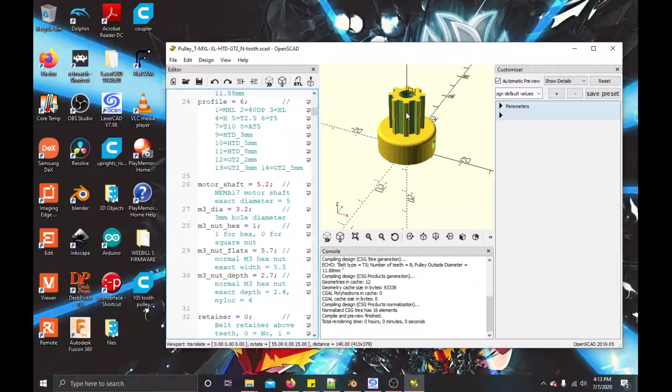I was having issues with SCAD information for the dimensions of the pulley teeth, and I wanted to talk about that. If we go to new, we open that information like before. You remember I was telling you guys that you can add whatever amount of teeth and information. Well, there's a way to do it accurately so the teeth will actually fit on a belt. But I don't know exactly where that information is in here, how to set the dimensions, because once you start scaling it out, it actually throws off the teeth information. So this would actually be fatter and it's not accurate.

That's why whenever I was setting it up for 260 millimeter or 260 teeth earlier, it gave me that weird big tooth spacing that I was a little confused about. I thought that was me, and I thought I had the wrong amount of teeth, but I was right, I did need 260 teeth. It's just this scaling for the teeth dimension was way too big and it threw a lot of stuff off.

So if you're not wanting to try to figure this out, because I really don't have the time to read through all the code to figure out exactly what's going on—it mentions a few things here and there that kind of get you started, but it's not a set thing—I'd recommend, if you're trying to do it, another way which is a lot quicker. Granted, it's using Fusion 360, but it's still pretty quick. So I'm gonna show you guys now how I got this going.

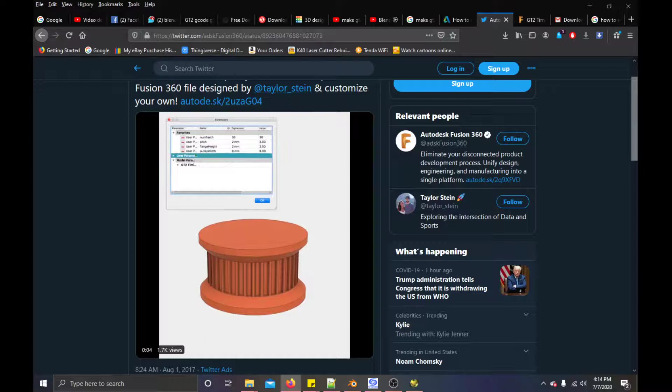So if you go to this website here, it's a Twitter website. It shows a Fusion 360 file designed by Taylor, and it's a customize-your-own. So it gives you this information here to show how to make your own.

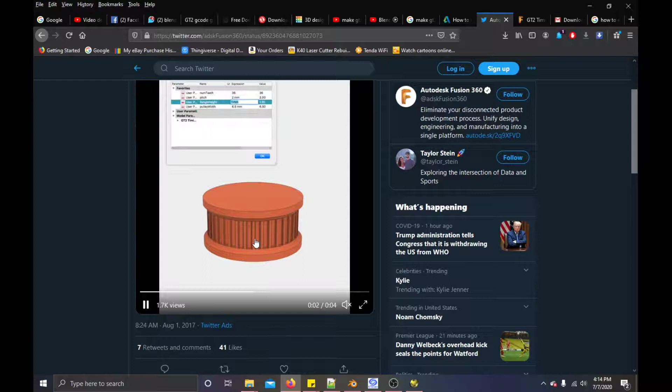So that's what I did. I went to the website, just clicked on it. Once you do, it comes up as a new tab. At that point you'll download the Fusion 360 archive and it will go to your email. I had it go here, downloaded the file once I went into my Gmail. Once that happens, it comes up as one of these. So you just click on it and hit open, and as long as you have Fusion 360 installed, it'll pull up automatically for you.

I still use Blender. I try to stay away from Fusion as much as possible because we never know when Fusion is not going to be free anymore, and I know for sure Blender is always going to be free. That's why I'm not trying to use Fusion as much. I do use it for certain things I just can't get around, for instance this, because nobody's built an add-on or a Python script or any kind of generation coding information to make a gear for GT2 pulleys. So that's the only reason I'm using Fusion right now. But honestly I'd rather not. This is all I have to use, which is pretty quick to do.

So now that you have it open, for some reason it opens up two tabs. I don't know why there's two, but it opens two for me anyway. I don't know if it'll do it for you.

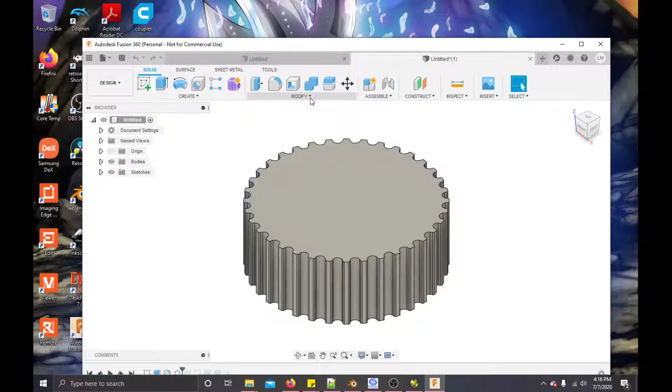You're going to go to modify, then down to change parameters. Then all you have to do is set the number of teeth you want. So if I want 260, I put it there, click down and click OK. Give it a second because my computer is probably a little slow with this—Fusion is a very high demanding software for CPU usage. It seems like it takes a while. Once that happens, you see the value change to 260, and even the background got bigger.

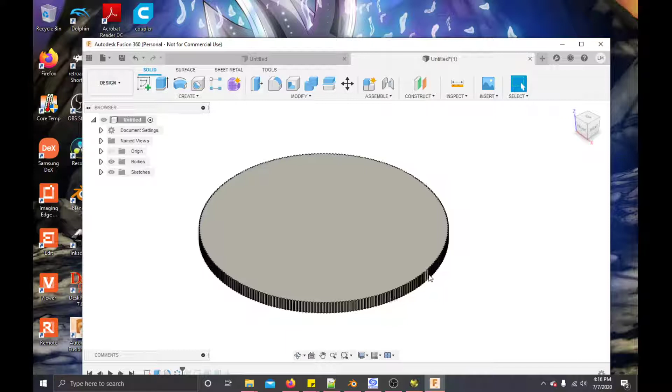So we hit OK, and we have to scroll out so you can see it. Now you can see this is 260 teeth basically around, and it's about 260 millimeters.

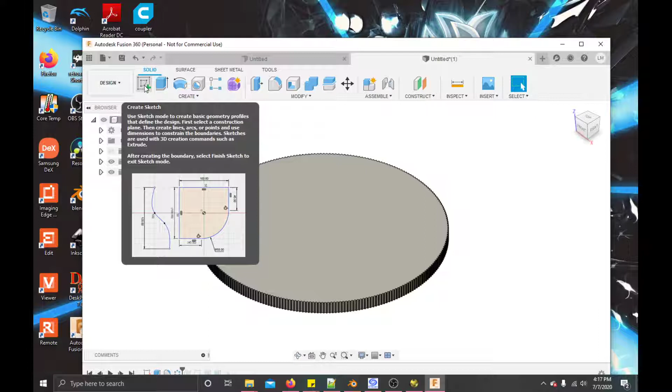Now for my flange, or bearing, like I was mentioning beforehand, I need to be able to mount that. Quick and easy, really fast, I'll show you guys. My measurement was 145 for the inner diameter hole that needs to be mounted to my actual bearing. Granted, I do need other holes that mount this part to the bearing, so I need like M4 or M5 screw holes on the part, but the center diameter needs to be hollow.

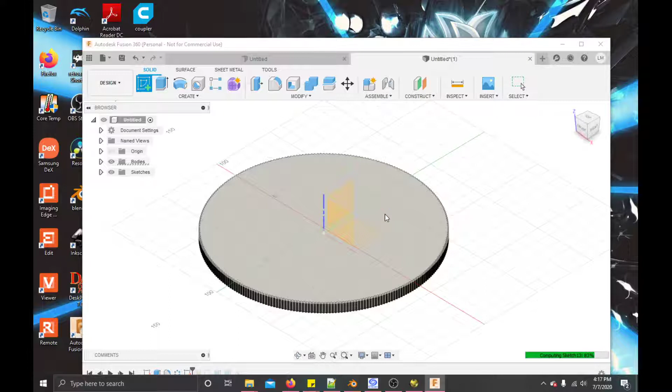So we need to just create a sketch really fast, and we want to go to the top. It gives it a second to load here because there's a lot of geometry going on. We'll go to the top, and now that we have that, we'll hit this center diameter hole, go right to the center, and pull out. You just click and pull it out, and I'll do 146.

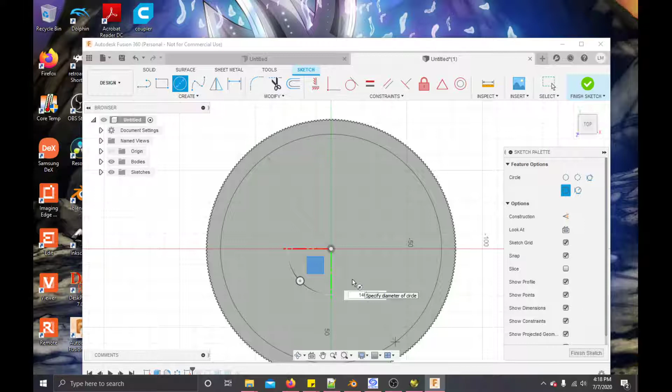That gives me a little bit of clearance for the spacing, and then I'll hit enter. The spacing I mean is I want to make sure that the outer diameter still shows a little bit of the metal or aluminum. Once you cut through here, you'll see a little bit of aluminum, because I don't want this to overlap the aluminum—I want this to be sitting on it. So I just wanted to make sure it has a little bit of aluminum peeking through on the edges.

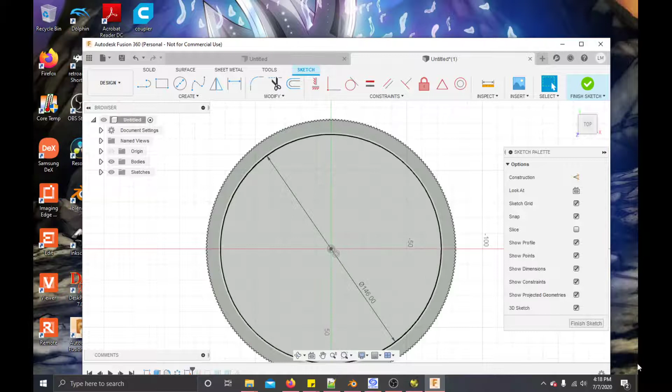Anyway, now that I have that, the next step would just be to cut it out. So once we're done with that, just click Finish Sketch. You can move your geometry a little bit here. So what we want to do next is just click on this little corner, and then let's do this and this. There we go.

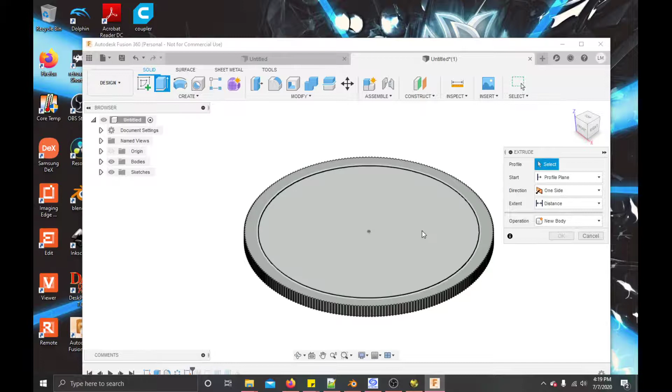Now what we're going to do is just hit Extrude. Just like in Blender, you'll extrude in or down or up or left or right, whichever axis you're on. Right now we're on the Z-axis, so we're going to be extruding downward. We just pull this down and hit OK, and that will cut straight through it. Now we have that diameter hole.

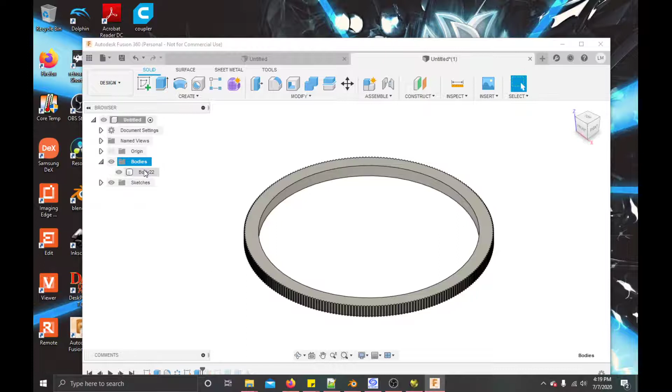Now the next step would just be to hit Bodies—right click, well actually you have to drop it down so you can get to the body, so you have to do the drop-down arrow, right click on it, and then you're going to save as STL. Then it's going to start generating the mesh for you, and you'll start seeing lines pop up.

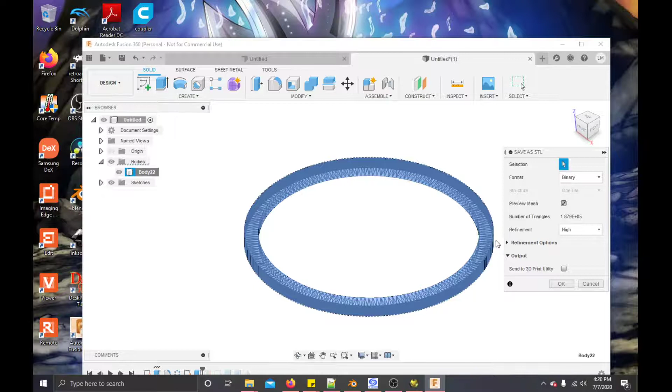See right here, these are the vertices, edges, and faces basically. And then you can set your resolution. I set mine to high. You can set it to low or custom or whatever you want, but that'll be the number of triangles inside of here, which is kind of dumb—I wish I wasn't doing all this, but it's fine. I'd rather have high resolution because I want my circle to be very circular, not kind of like an octagon shape. Once that's done, you just hit OK.

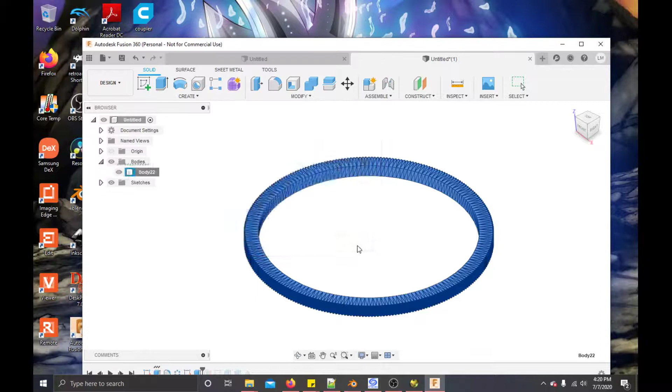Then you'll just type in whatever—I already made one, so I have that information and don't need to save it, but you'll type in the name and save it. It'll go to wherever you normally save files; mine goes straight to downloads, I don't know about yours. So then you hit save, and you're all good to go. It exports out, and then you can bring it into Blender.

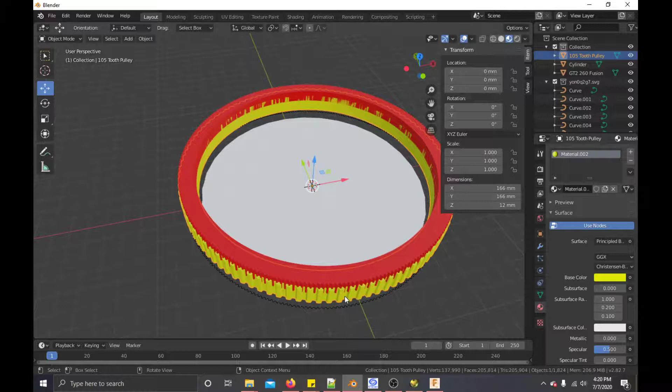That's what I did—so originally I brought it into Blender, sorry. So what I did was bring it into Blender. First, just to make sure this was wrong—this is the yellow one right here—is the one I got from this SCAD version that I was first showing in the first video.

And now you can see, if I scale in and move around a little bit, the teeth diameter is not accurate. So this right here is an SVG that I started from in the first video that I was able to go back to and see. So I generated the SVG using the GT2 information that I showed you in the first video.

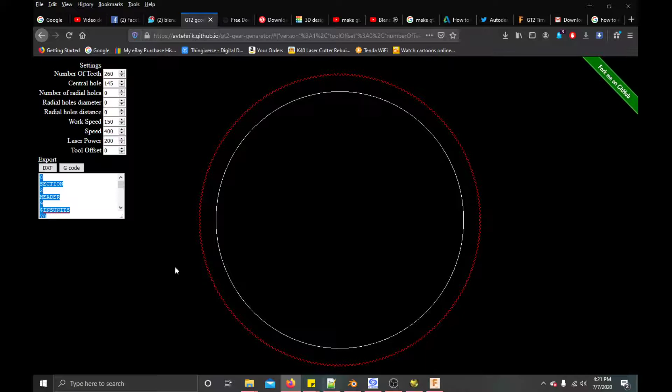So this is 145 for the hole diameter, then 260 teeth—see that? That's exactly 260. So I wanted to make sure that one of these was going to line up with this SVG file, so I had to convert that into SVG. Like I mentioned, it'll be on the first video because it comes out as a DXF file. Anyway, I was able to get this into Blender as an SVG because this doesn't take DXF, I believe, and at least Blender doesn't.

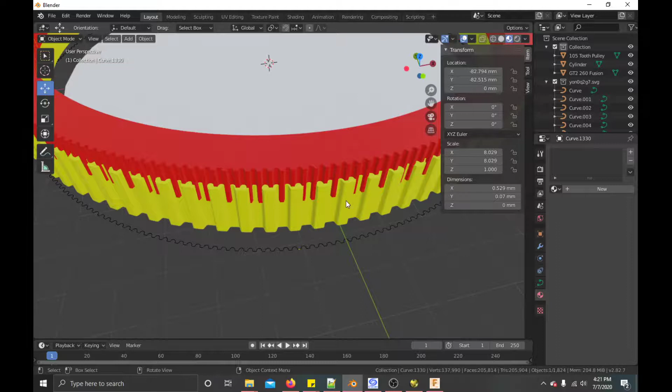Then what I did was just try to line them up so I could see if they were lined up properly. So you can see from the top view, if I do Shift Z, we can kind of see the differences here. This is the yellow one—you can see how fat these teeth are. This is definitely not a GT2, look how it's taking up about a whole tooth by itself. So this ain't good, we're just going to delete that, it's useless. And then this one is our Fusion 360 file.

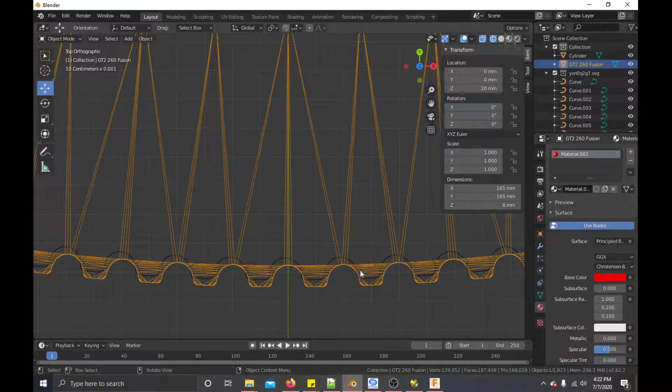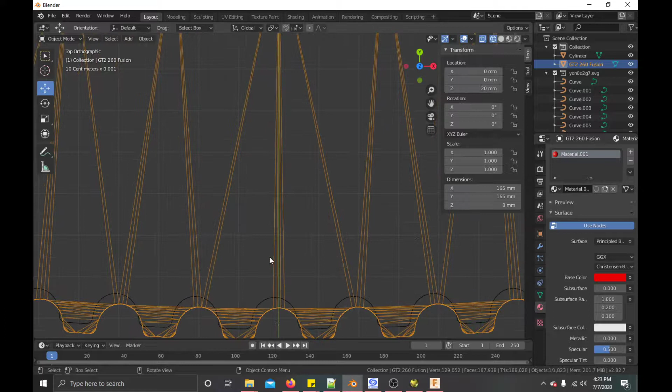You can see it lines up perfectly with this one. The only reason it's a little off is because of my movement in here, it wasn't Blender or the file, it was me, because when I exported it out as DXF to SVG, it scales it down for some reason, so I had to try to scale all this information up, which was kind of a pain since the center of origin shifts on import. So that was just me trying to finagle it to where I want it, but you can see it pretty much lines up, just a little off due to my user error. So for sure, Fusion 360 works, and it gives you that information.

And plus, if you want to check your measurements just to make sure everything is right, you can always use the measure tool in Blender, so you can see what the measurements are to make sure everything is accurate. But it should be accurate without any issues or flaws.

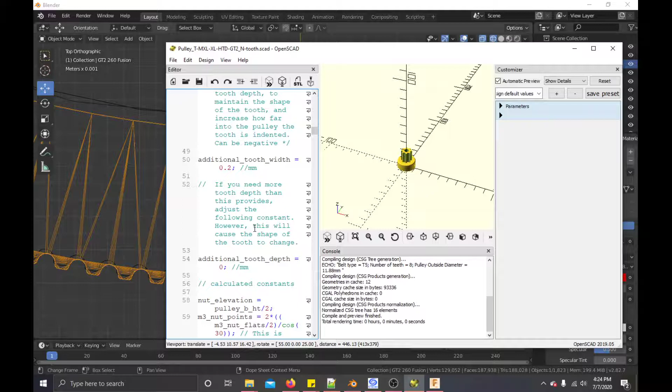So for sure, that first video is good information, don't get me wrong, and there is a way to make this one work. You just have to read through the information and probably do some testing to actually change the tooth pitch and information through the coding, so you won't wind up having a fatter gear tooth than need be. But the Fusion one works, I showed you guys it does, so we don't have any issues.

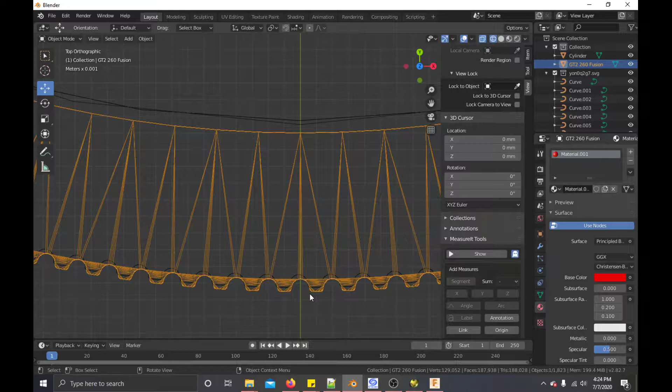Either way, there's always going to be a workaround for the stuff you're trying to do. So until I find somebody that creates some kind of Python script or G-code generating STL file, this is pretty much what I have to work with. At least it works. This is my only option at the moment that I was able to find, so I'm just happy I was able to do so.

And with it being in Blender, I can always manipulate the vertices however I see fit. So if I don't want it this tall, I can change it. Like the item size is 8 millimeters thick.

If I wanted to, I can go into edit mode, deselect everything here. We're on regular select, so if we do just the top vertices, I have to zoom in a little bit, probably hit B to get all these top ones. I don't see that it selected them. That was weird, hold on. B, select the top vertices, so it selected all those. We don't need all of these, let me see if I can deselect all the bottom ones.

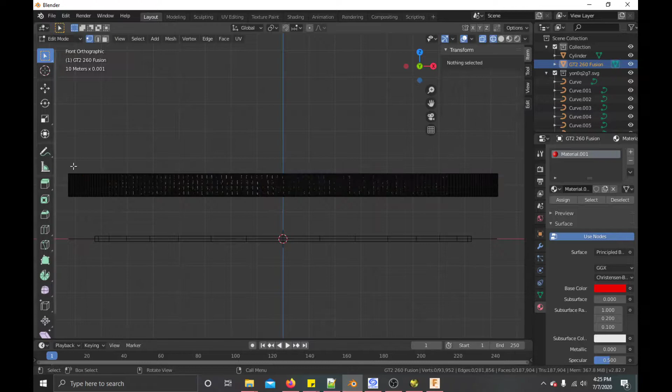Honestly, it's one of those things where that's why I don't like using Fusion as much, because it does stupid stuff that I don't like. Honestly, if this was a Blender file, it'd be a lot easier to use and manipulate.

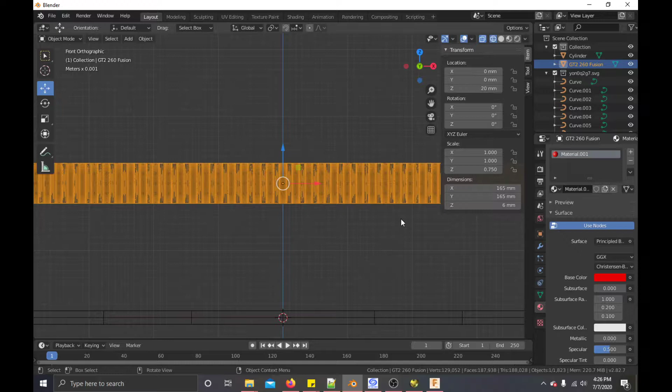But either way, even if you don't want to do it that way, you can always just change it here. So if I don't want it to be 8, I can change it down to 6. Bam, 6, that was even easier. That's what I'm trying to say, you can manipulate whatever you want out of this.

Once I get my measurements for the holes I need to cut out for my bearing, all I have to do is add a cylinder, make sure it's the right measurement, like a 5 millimeter bolt or something, bring it over to the locations the holes need to be at to mount to my bearing, and just add a boolean modifier, cut it out, just like you would anything else. And then you have your custom made pulley.